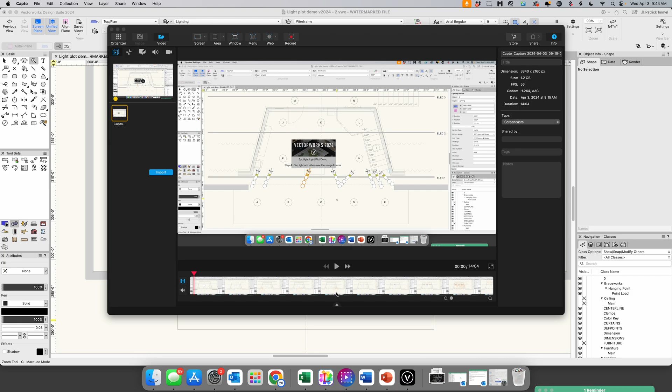In this video, we're going to do the second half of putting lights over the stage. In the first part we put in our top backlights, and in this one we are going to put in a couple specials on these doors, and then we're also going to put in our cyc lights. So let's go, let's boogie.

The first thing I'm going to do is put a couple specials, and focus them very tightly right on the door frames. I do that a lot because many times when people come through the door, we want to see them right away, because they're either making a big entrance or going to say something, and it's helpful to have that little extra bump in light to highlight them and give them visual importance. You don't have to do it all the time, but sometimes it's nice to have just a little more light there.

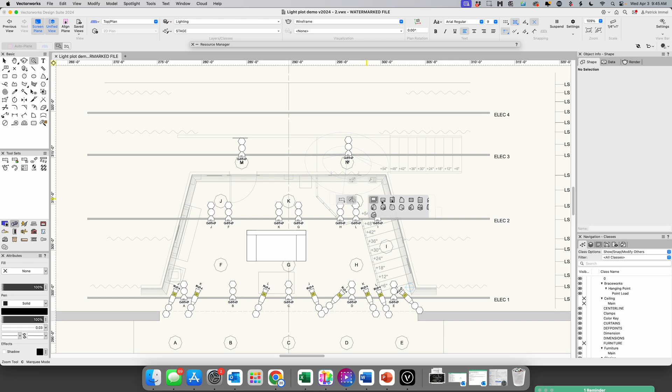So we're going to start with this one right here. I'm just going to cheat and drag this fixture over, copy and drag it, put it right in the middle there. And I'm going to set this focus, or the rotation. I think this one is going to want to be 0 if I play my cards right. Yeah, that looks pretty good.

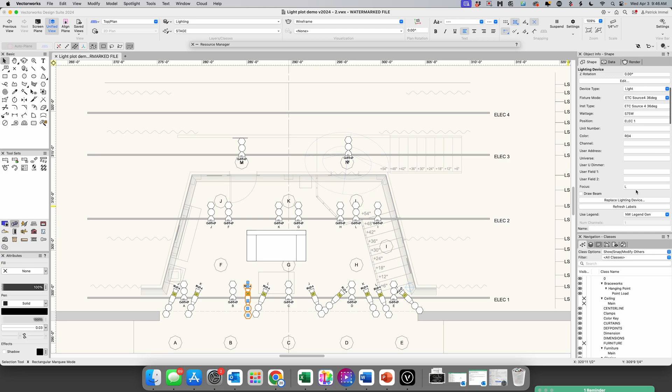What we're going to do is change the focus to M. And what I'm also going to do is change the lighting fixture to a 19 degree. This is a 36 degree, and it would be really big for this use, because we need it to just literally light a 3-foot doorway. So I'm going to change this here. Let's turn it on and see what it looks like. It's going to be pretty big. Yeah, we'd have to shutter off quite a bit.

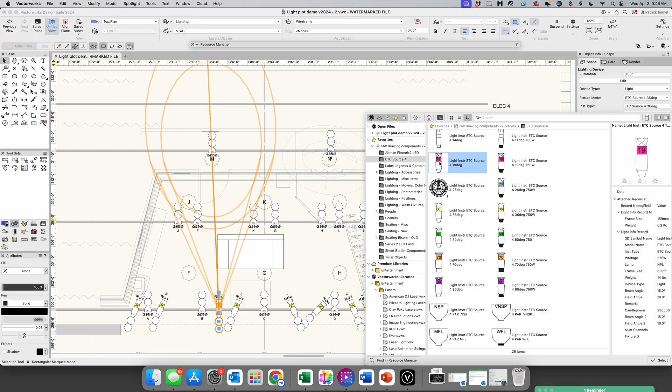But let's change it to a 19 degree. So here we are, and there we go. Yeah, that is way less shuttering, way less wasted light. So this is going to be a great fixture for this point right here.

Okay, now this one again, we're going to need to do some moving around here. What I'm going to do is slide this down, and put this fixture right in between these lights right here. Okay, here I got a little too far. I'm going to nudge it over just a little bit so it's sort of right in between. Change the focus point to N.

And I'm also going to change the color to no color. I'm just going to change it to, for now at least, no color. So we just come up and do NC. That means there's no gel. Surprising, it should say NJ, but typically it says NC for no color. So there we are there.

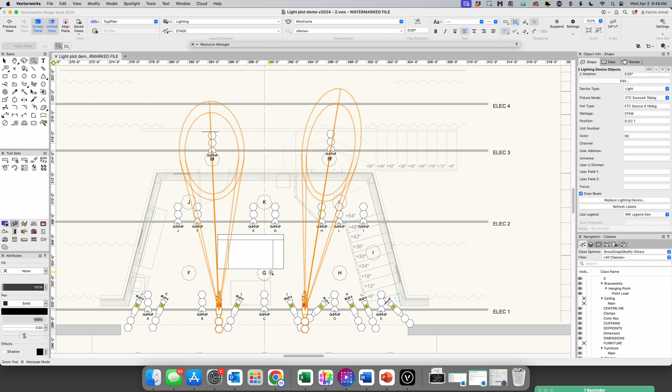Now, if we zoom in and look, it looks like the lights are going to fit. You see how these label legends are sort of getting a little jumbled up, and they're getting on top of each other. And we really need to see this information on the light plot.

So what we can do, the fixtures are great, is adjust some of these label legend containers, and it's pretty simple. If you select the fixture, and I want to move these two, watch my cursor as it changes from an X to a slashy, that's what I'm calling it. And when it's a slashy, I can click and drag, and move this circle, click again, and move it out, and it's out of the way. I'm going to do the same thing here. Move that right there. So now I'm going to do the same thing over here. Let's see.

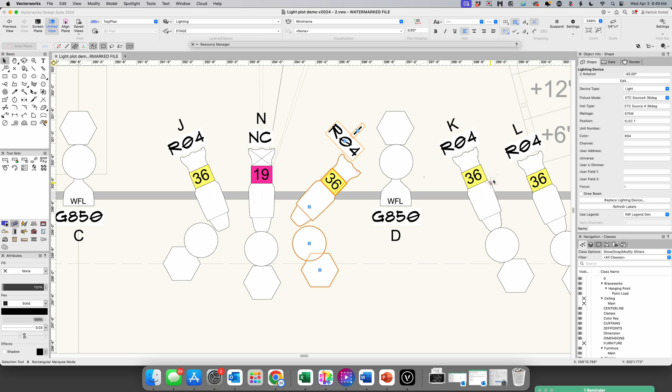Now we'll be able to see all the data. Sometimes what we could do if this started getting in the way, we can also move the text over just a little bit, and there we are. So we can move it around to make the information and the data on the plot be more readable and more accessible.

So we have our specials in. I'm going to turn off our beams, and now what we're going to do is add in our cyc lights. Here's our cyc, and we're going to put some fixtures in.

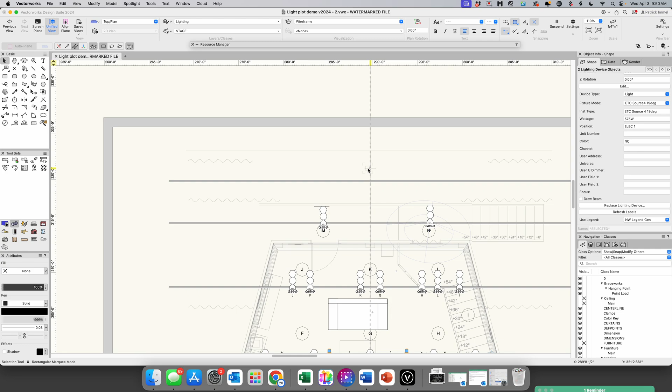At Northwest Missouri State, what we use is some Chauvet, I believe they're Colorado Batten Tour fixtures. So let's come up and find them. We're looking for movers, and yeah, Chauvet Colorado Batten 72 Tour.

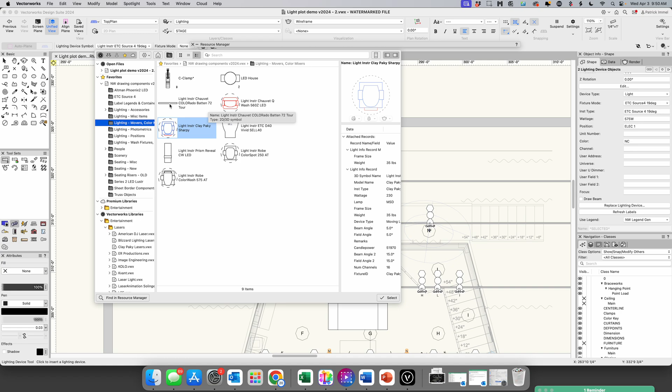So what I'm going to do is double click, and I always start when I put in my cyc lights by putting them in the center, because we don't want to have an overlap and a potential dark spot in the center.

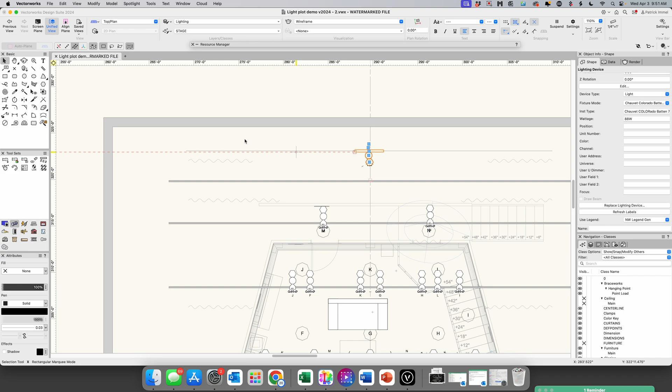So I'm going to put that in, and right now it gave our label legend a space for a dimmer and a channel. These are DMX fixtures, so I have a special label legend for that.

So we're going to have it selected, and we're going to come over and use where it says Use Legend. I'm going to click on it, and we are going to use Northwest Legend LED strip.

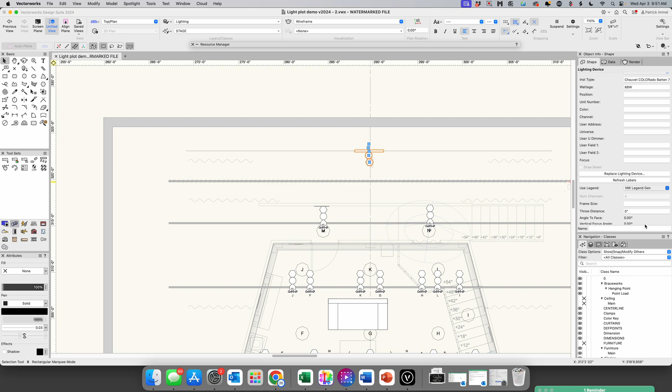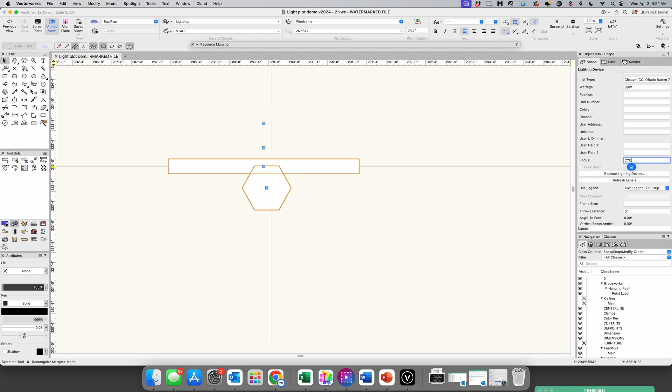There we are, we are ready to put stuff in. So what I want to do is put in focus. We usually don't do focus points for the cyc lights unless you are doing something with Augment 3D, which is the ETC, Electronic Theater Controls, Previs software.

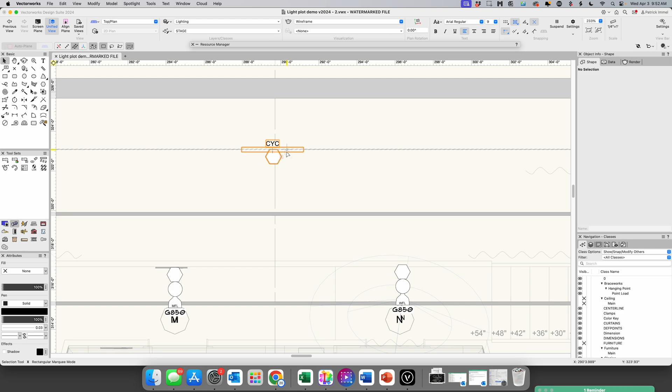So we're going to call it cyc. Okay, and what we're going to do now is we want this cyc to be as smoothly lit as we possibly can. These are not the best fixtures to light a cyc, but it is what we have to do the job.

So what I'm going to do is just drag these down so they're almost touching. So almost, drag another one, and you can kind of see the curtain here. We want the whole thing.

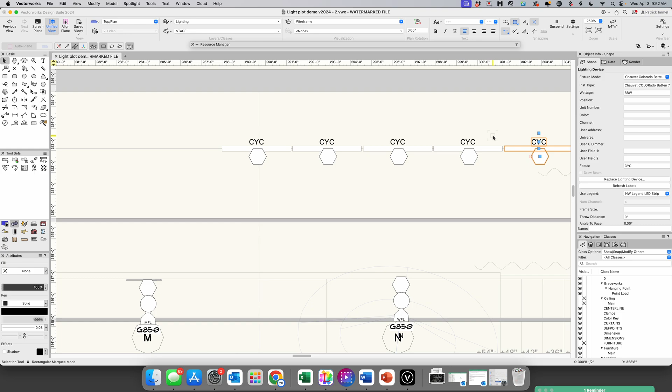Okay, and now this next one I'm going to put, and a lot of it is behind the cyc, but this will ensure that the cyc is lit from leg to leg. Okay, and it should look pretty good.

Oh, I have it on, I just put the lights on the cyc. That's wrong. But the great thing with CAD is we can select all the lights, and we are going to drag them, and they're going to snap onto our fourth electric, and there they are.

I'm going to scoot them down just a little bit. Now again, this is a decision to make. Now they're in front of the leg. So if we did not have this one here, chances are there would be a little bit of a dark spot in here, and we could do a couple things.

We could either move the leg in a little bit, or we can add an extra fixture, and then there might be a little light on the leg. I'm going to go with the extra fixture, and we'll see what we can do to deal with light on the leg.

I'm going to select all of these, and all I'm going to do is mirror them. We don't have to mirror the first one, but we're mirroring them around the first one, and there they are. All right, so we have all of our

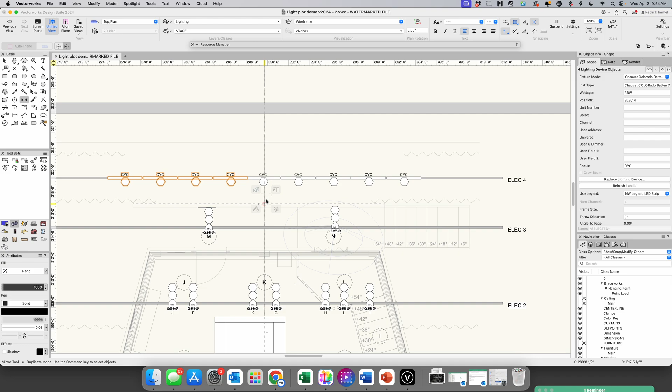cyc lights in, and I think we are in pretty good shape. So in this video, what we did was put in the cyc lights and the specials for the door, and I also showed you how you can move the label legend around to get a little bit more space and make your light plot more legible.

So in the next video, it'll be a quick one. I'm going to show you how to put in practical symbols on the light plot, and I will tell you what that means in the next video. See you soon.